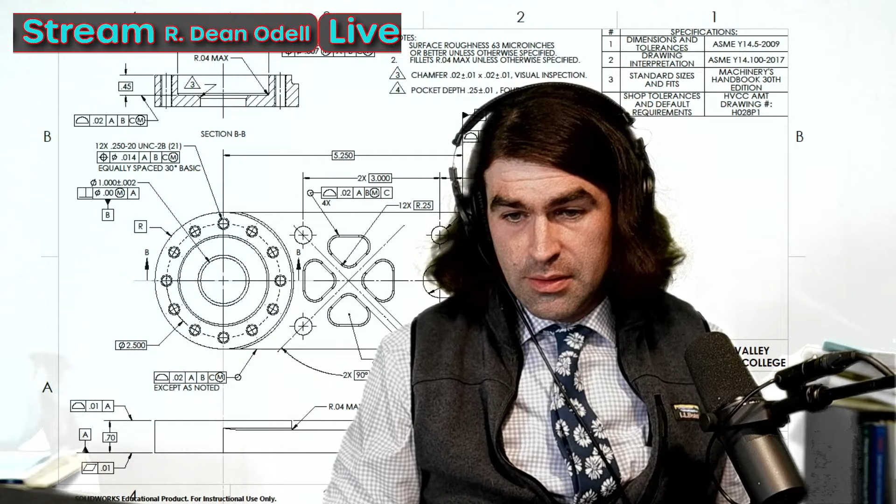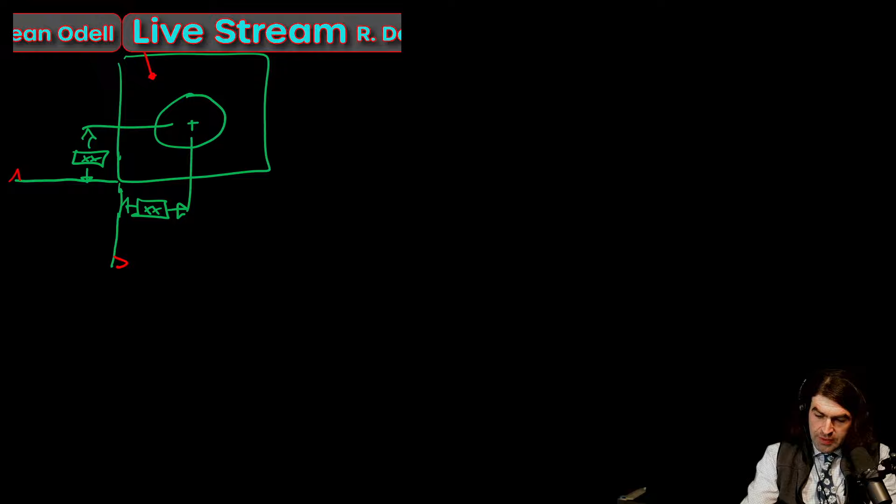We're going to have datums. And this drawing is going to be slightly incomplete, so don't screenshot me. It's just right, nice and simple. So we got basic dimensions. Doesn't matter what the actual number is because they're theoretically exact, right? They're perfect. So there's no variation on that.

So we've got datum A as a surface parallel to our screen because we have this leader with the filled in dot. Datum B is horizontal. Datum C is vertical. That gives us the origin for our measurements right in here. Okay. With position, when we use GD&T, that gives us a little round tolerance zone right in here.

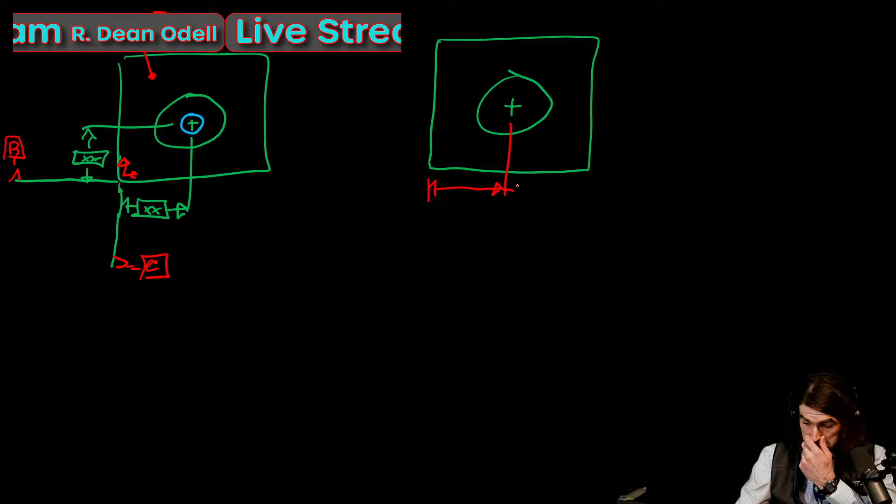Now I want to contrast that to the exact same part with plus or minus dimensions. So with the plus or minus dimensions, I am going to give it a tolerance. Right, so in both cases, I don't care what the diameter is or what the tolerance on it is.

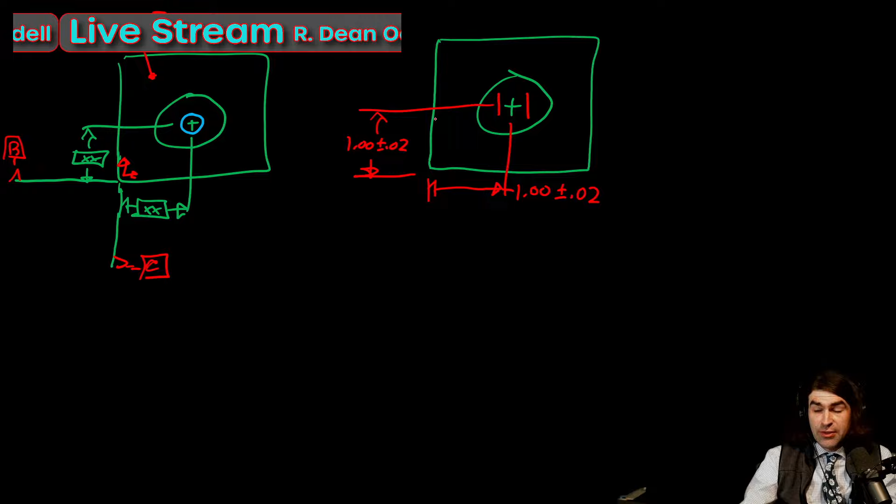So in this case, with this plus or minus dimensioning scheme, the tolerance zone is not going to be a circle or a cylinder. It's going to be a square. Right? And I hope we can kind of see that. You've got your variation left to right. It's 20 thousandths. Variation up to down is 20 thousandths. So you end up with a square in the middle of the part.

And for some things, that's basically fine. You know, like some flat, sheet metal-y parts, it really doesn't matter that much. As parts get thicker, position starts to matter more because position is going to have an influence on the perpendicularity, whereas with the plus or minus, it's difficult to do that without complicated notes.

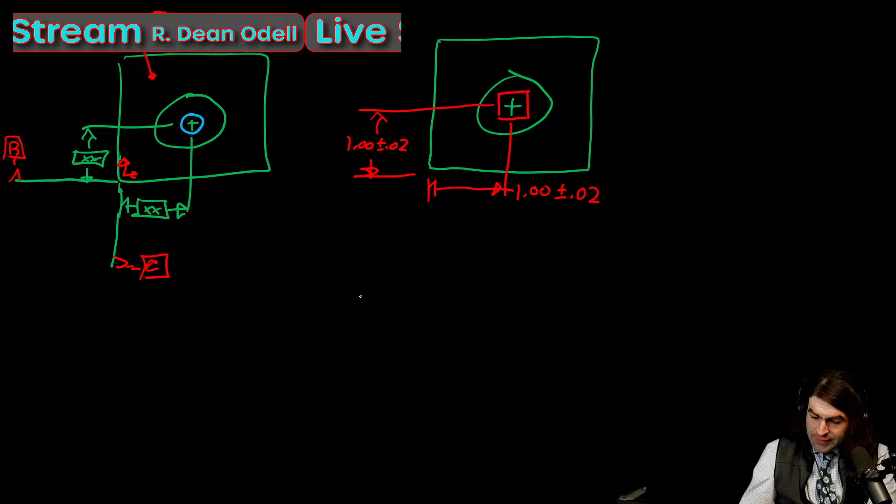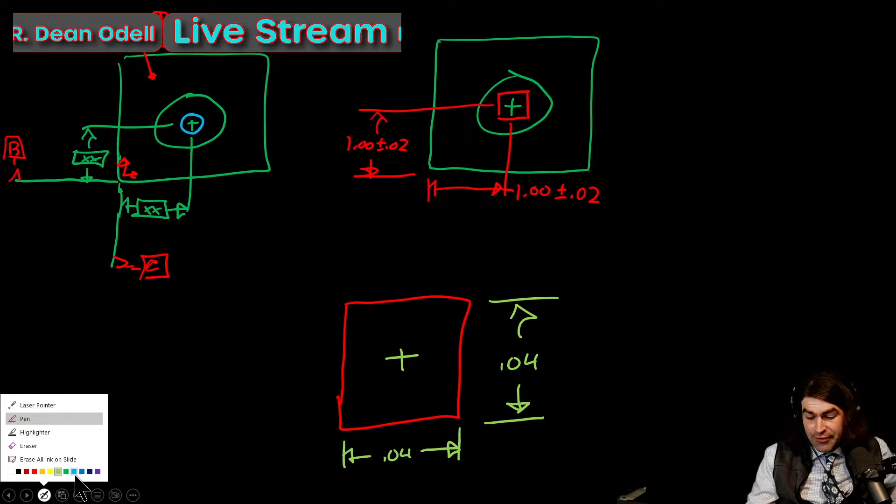Okay, let's take a look at this tolerance zone, or coordinate dimension tolerance zone. So we're saying we've got this square that's plus or minus 20 thousandths. So the square is basically 40 thousandths, right? And at the center is where we'd really like the center of that hole to be, right? And I know those of you that have taken a GD&T class have definitely seen this before and probably had it explained before. But those of you who haven't, this is a good way to see what's going on.

All right. So say we make a couple of these parts and the center of the hole is in a couple of different locations, right? Marked by these little X's. So the first location, let's say we have a hole and we measure and it's right at this edge, right? Plus 20 thousandths in the Y, 0 in the X. That's going to be acceptable, right? No big deal. Same thing if we measured over here, that would be acceptable. We're just plus 20 in the X, 0 in the Y.

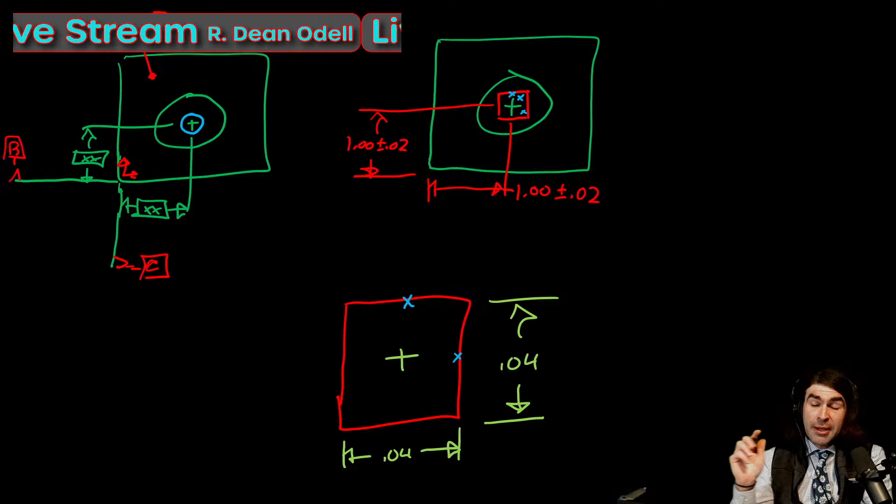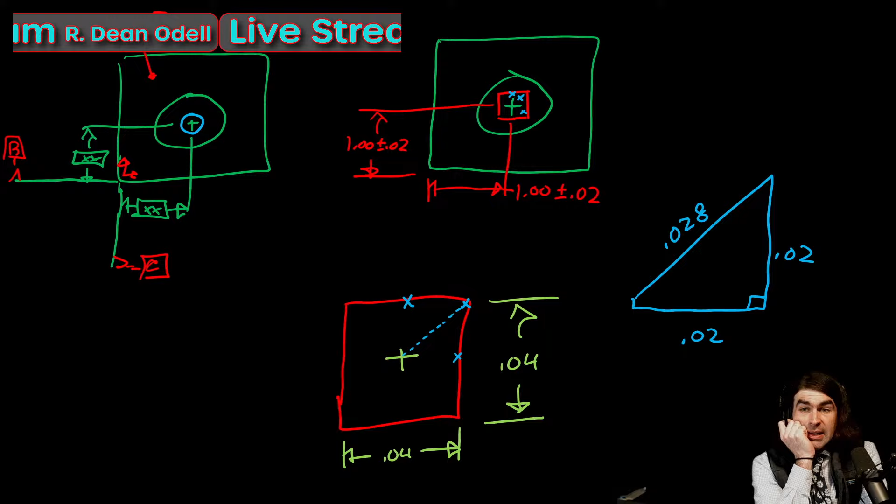And we'd be okay if we have a hole in this corner, right? And that distance is going to be greater than 20 thousandths. And most of you probably already see this, right? We have a little right triangle with 20. And if I can remember right, the hypotenuse is 28 thousandths. And that's just going to be Pythagorean theorem. No big deal there. The problem is I could measure a hole, say, down here, and it's 28 thousandths away from the center, but in the wrong direction, basically.

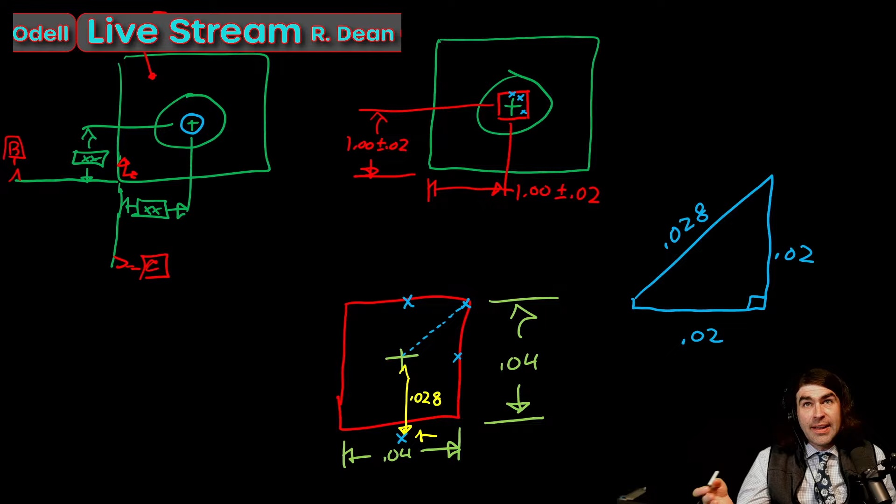So what happens is we have to fail this last part right here because it's outside of the square tolerance zone, but it's the same distance from the center. So notionally, that part would work the same as a part that has the measurement in the corner here. So what we're doing with tolerances of position is we just make this a round tolerance zone, right? We just put a circle around the square. And that's how we're going to describe a tolerance zone.

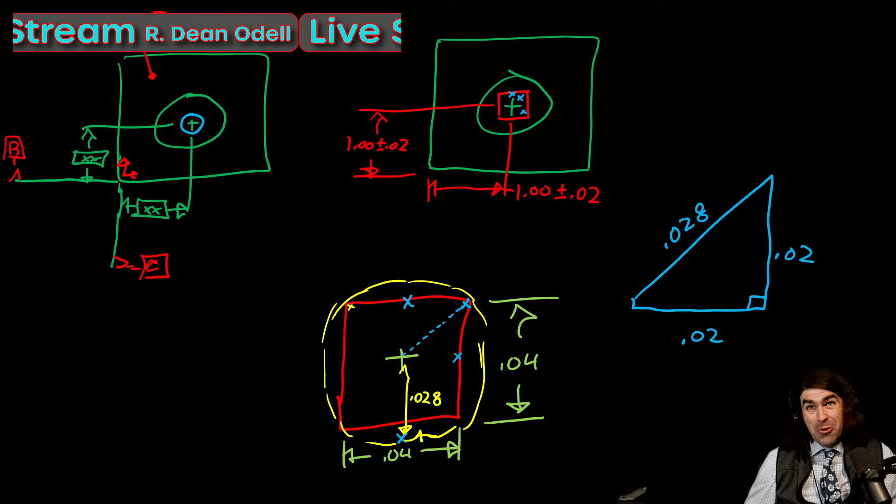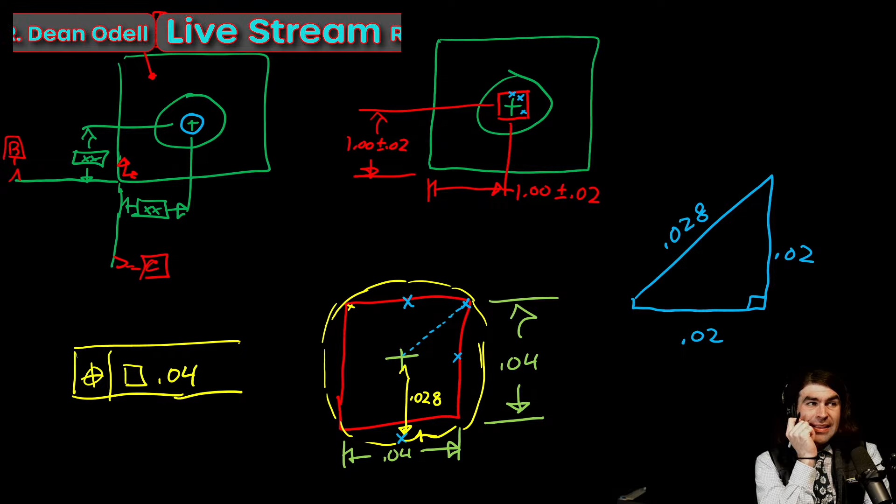Now, you can, with position, have a square tolerance zone if you wanted to. It requires that you use 2 feature control frames. You could do a rectangle or a square. There's no support for this, and I've gotten this question before. Why can't I use the sweet square symbol of 40 thousandths and apply it to something? I think the main problem with that is it's not clear what orientation the square would be in. Also, there's no documentation, no pictures, nothing in Y14.5. So you'd be on your own if you put this on a drawing. You'd really have to explain exactly what you're looking for there.

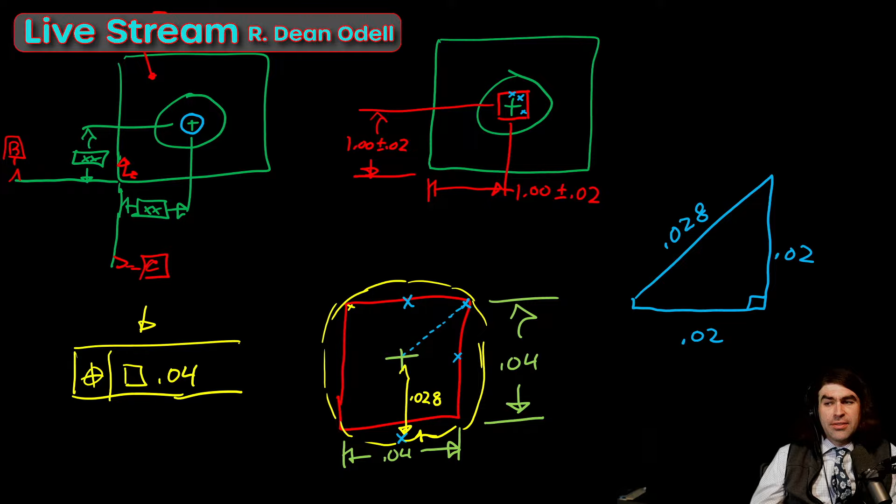Okay. So this round tolerance zone effect, what happens is when we go to measure a part, and you may have seen my video about this, you're going to measure from the granite plate in each direction. So you're essentially going to measure in the Y direction and then measure in the X direction. When your tolerance zone is a square, your X's and Y's are directly comparable to what's on the print, right?

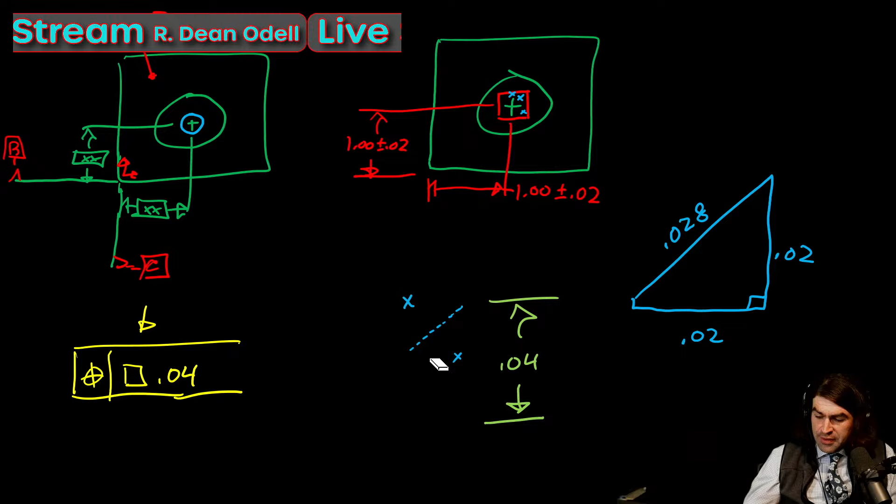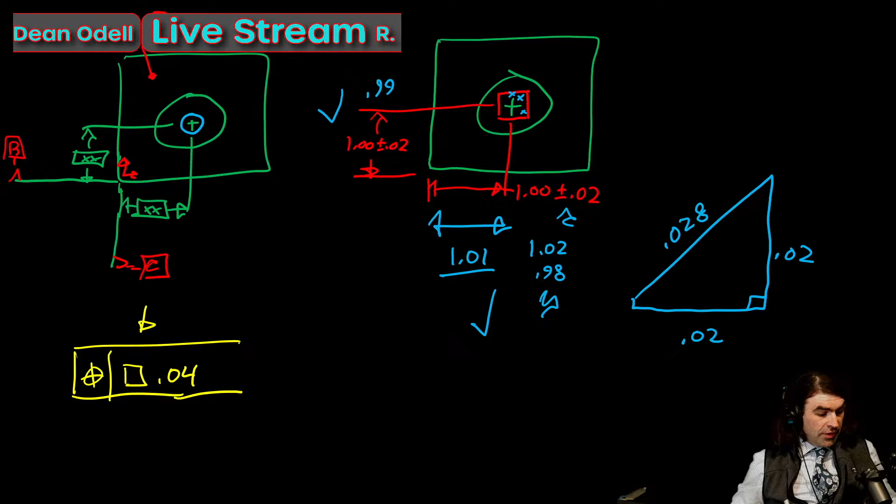So if I go to measure this part, and in this direction I get 1.01, I can look at this and say, okay, my maximum is 1.02, my minimum is 0.98. I measured 1.01, we're good. You can do the same thing over here. You can say, okay, we measured 0.99, that's greater than the minimum, we're good. And that's all you have to do as far as inspection, as far as verifying your measurements, which is pretty cool.

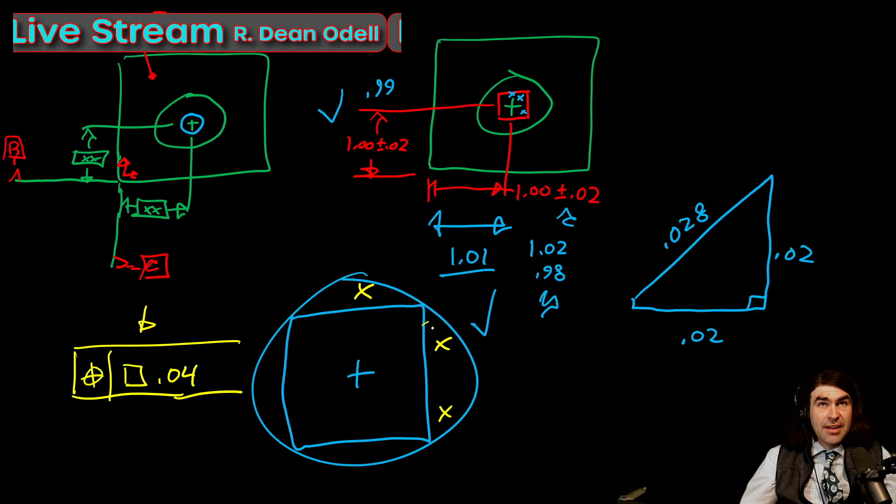Pretty quick. The issue with position is sometimes you can, just by looking at it, tell that it's within a square, that it's within a circle. But with position, you can have this round tolerance zone. You got this square, that's your plus or minuses. It's difficult to tell, in your head, if something that landed in this kind of no man's land is within tolerance or not without calculating it or graphing it.

Give me 1 second. Oh, sweet. Okay, so I gotta show you guys this. Check this out. I got this from eBay. It's a position computer. So I guess this is before calculators were super common for this. But basically, the way this works is on one side, and let me get this closer to me.

So say we measure an X and a Y, and we get 11 thousandths in X and 10 thousandths in Y. We follow this down, and that's going to tell us the diameter tolerance zone that is consumed. I can't even read it, so I don't know if you guys can either. So we've got whatever this number is. And then we can have any reasonable combination. So say we measure and we got 10 thousandths in one direction, 5 in the other. We would have a diameter tolerance zone consumed of 0.0224.

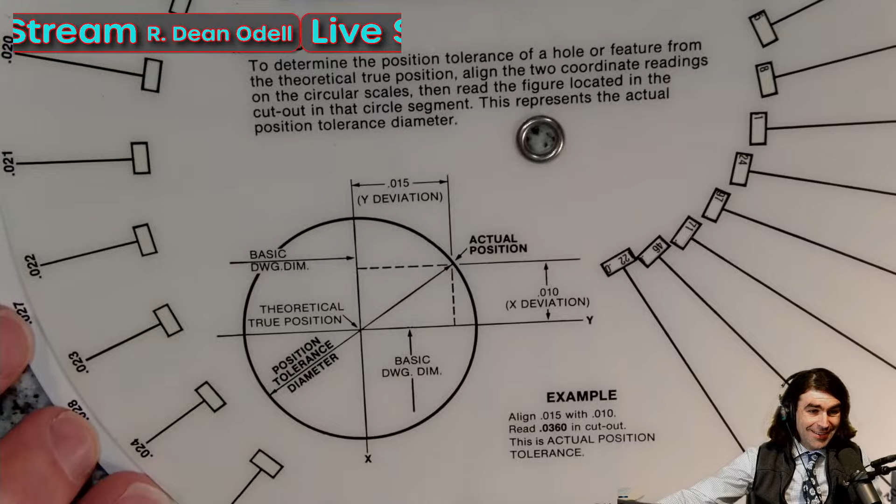So see what I mean? You get these measurements, you can't in your head tell if that would be good with a position of 15 thousandths or whatever. You have to calculate it. Now, not everybody is going to have one of these things. They are pretty handy though. They're pretty cool. You can use a chart. Obviously you can just do this in Excel and have a big wall chart. You could buy them. I mean, there are PDFs and stuff out there on the internet. We'll talk about, maybe today, maybe I'll have to do it some other time, the floating fastener, fixed fastener formulas as well. Same idea, these can just be calculated with this sweet position computer.

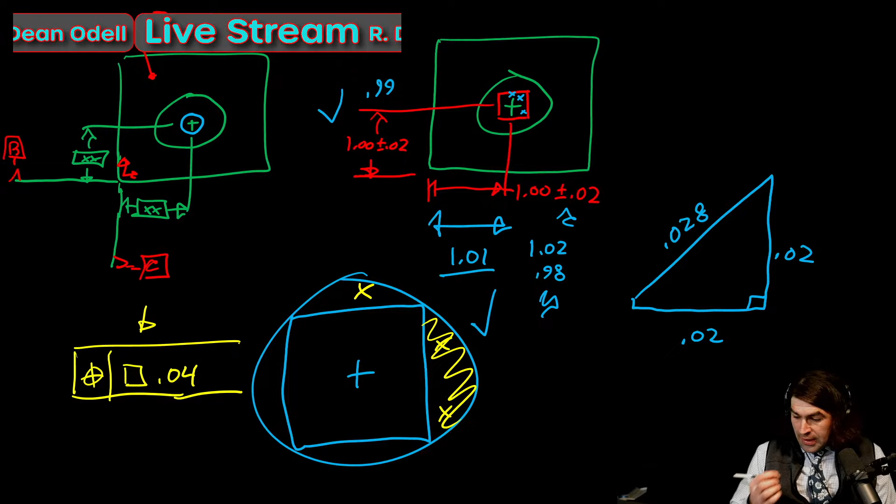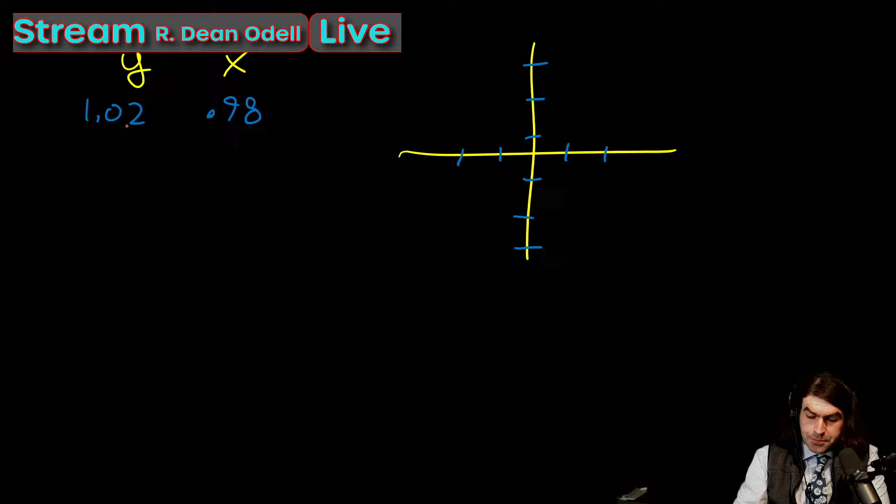Okay. So how do we figure out, say we go to make some measurements, and let me wipe this. Say we make measurements. And this is what we get. We measure our gauge pin. We subtract half the gauge pin, and this is where the center is. So we want to plot this on a little chart. And some of you may have seen this before. I covered it in my position video. So these are the measurements we get.

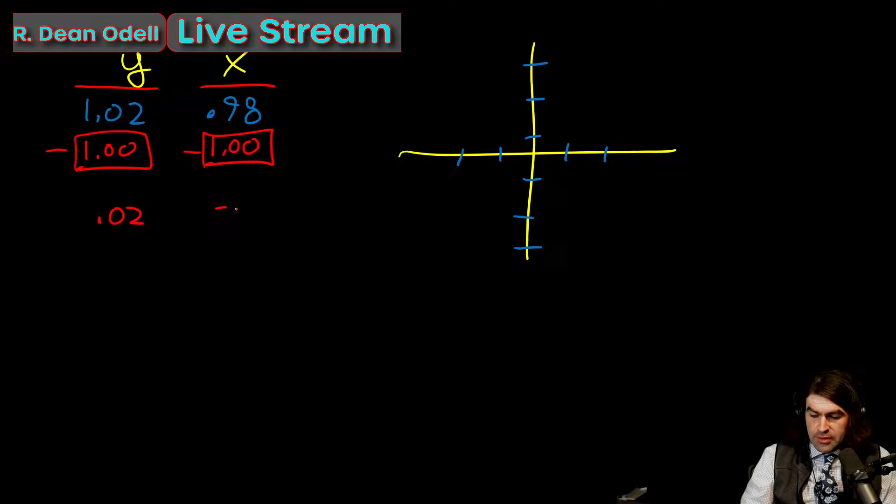What we want to do is compare each measurement to the true position. So in the center of each of those tolerance zones on a part with multiple features is a true position. So we want to get rid of the basic dimension. So we're just going to subtract, and I didn't put it on that drawing, but let's say the basic dimension is 1 inch. And this is going to give us our variation in X and Y. And we can plot this on our chart. So what I would do here, Y, we're going to be +2, and X, we're going to be -2. So our point would be right here.

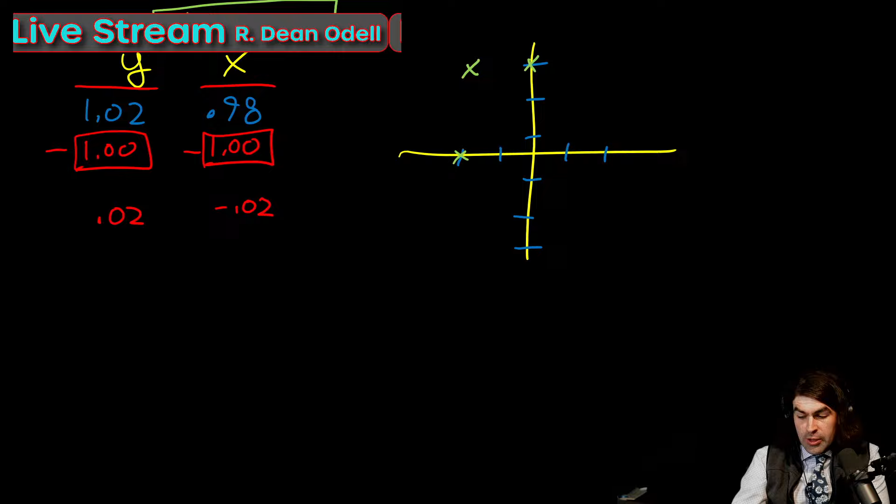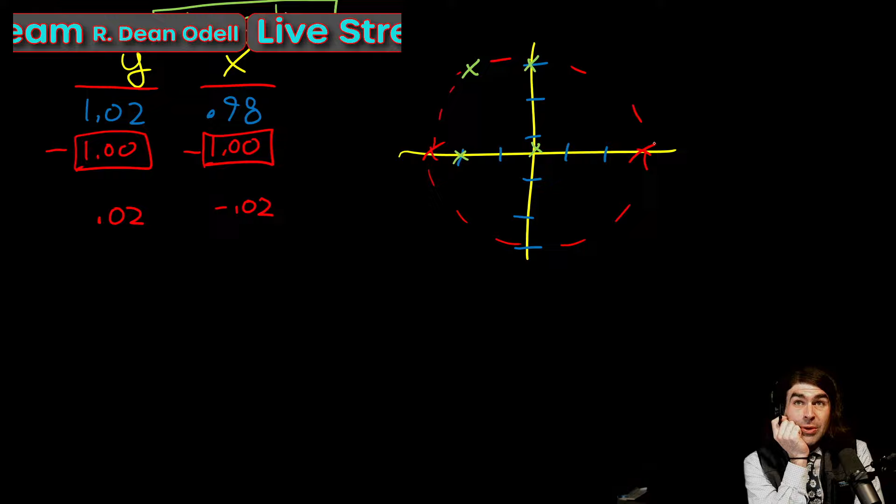And we want to know if that point, let's just make up, we want to know if that point is within a tolerance zone of, say, 28 thousandths, to some datum reference. So one way to do it is graphically. All we need to do is set one leg of a compass in this X, one leg in the center here, and then we can swing it around and just read off the ticks. And that'll tell us what the diameter tolerance zone is. And that's a perfectly valid way of doing it. The analytical way, to get an exact answer, as you might imagine, is to use Pythagorean's theorem.

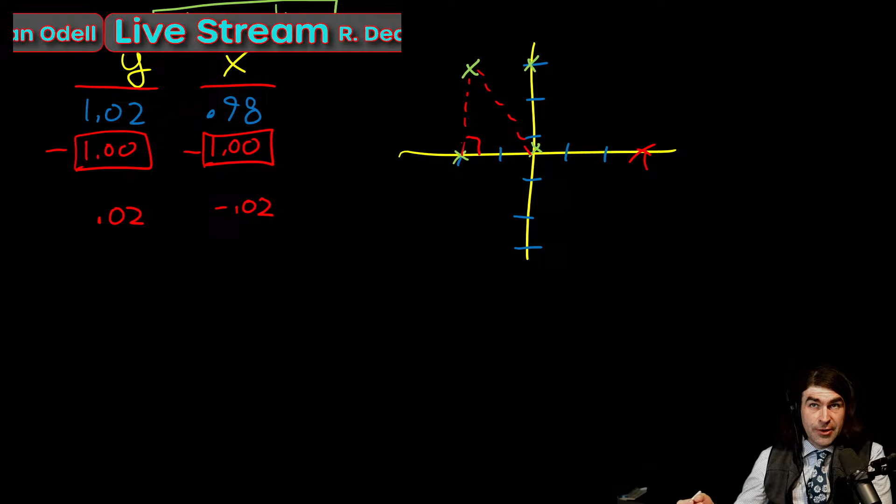Right, we're going to find the triangle. We're essentially going to compare one leg to the other leg to get the hypotenuse. So you may remember a squared plus b squared equals c squared. Right. So what does that really mean? I know everybody hasn't been in a math class recently, so it's okay if you don't recognize it immediately. Basically, the one side is a, the other is b, the other is c.

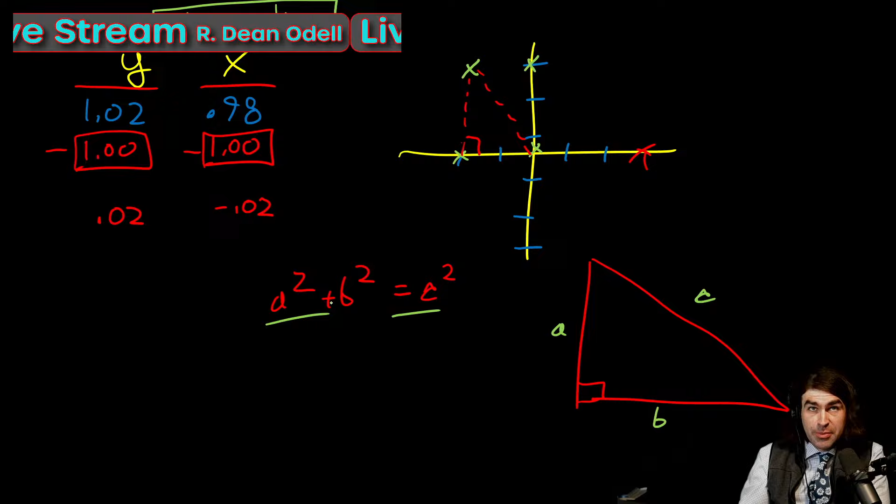So they have to meet this expression, right? a squared plus b squared equals c squared, if it's a right triangle, right? If this is 90 degrees. So what we want to do is rearrange this to solve for one of these, right? We want to solve for c, right? We want to know what that is when we're calculating position, because we're going to know the x and the y. That's what we're going to measure. And we got to figure out what the hypotenuse here is. So easy peasy, right?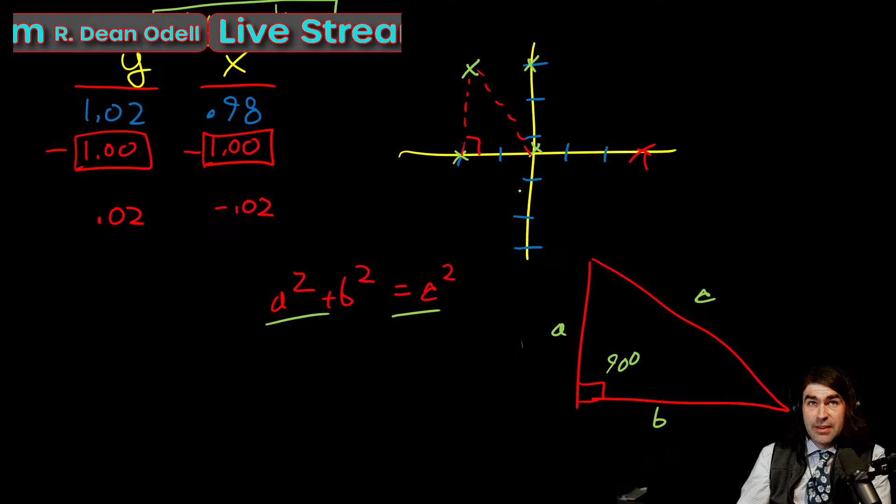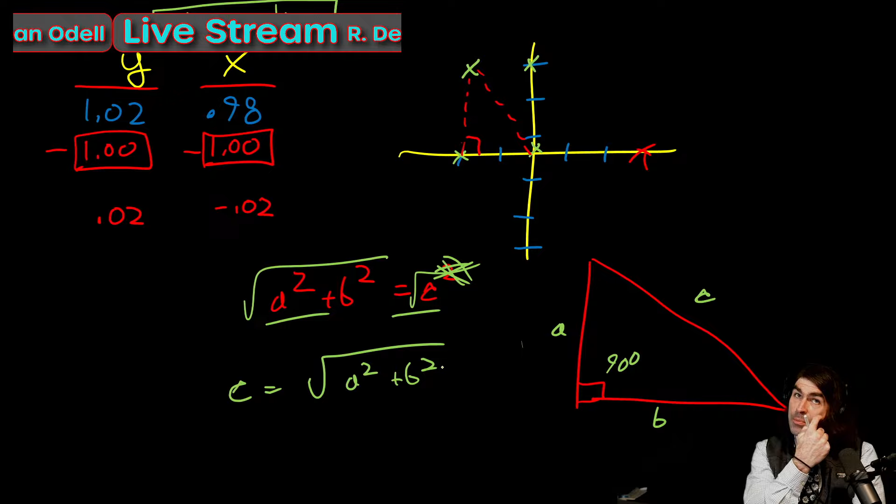We're just going to take the square root of both sides, and that's going to cancel out here, right? Square root and exponent cancel out. So we end up with c equals the square root of a squared plus b squared. We plug in our handy numbers here, right? And it's okay that it's negative because we're going to square it, right? A number times a number. A negative times a negative is a positive. So we'll put 0.02 here. We'll put 0.02 negative here, squared, add, equals c.

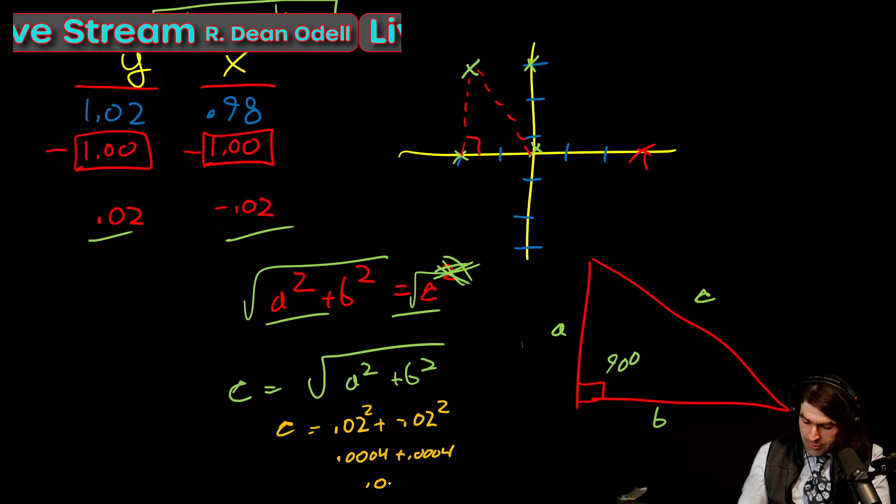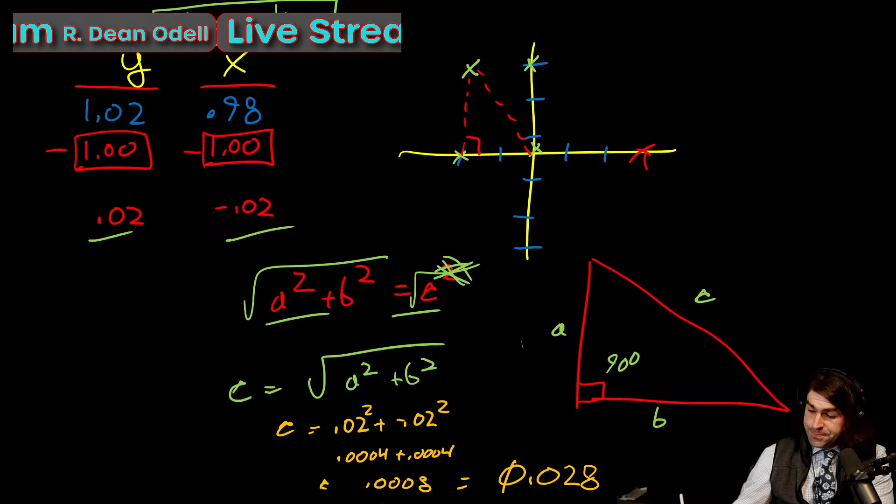I know this is going to be 4/10 of a thousandth. This is going to be 4/10. I don't know the square root of 8/10 off the top of my head. I'll have to go to my handy calculator. So that's going to be a diameter of 0.028, right? Which tracks. Oh, I'm sorry. That's going to be a radius. So we're saying this number is 0.028, and I'll explain why that's cool.

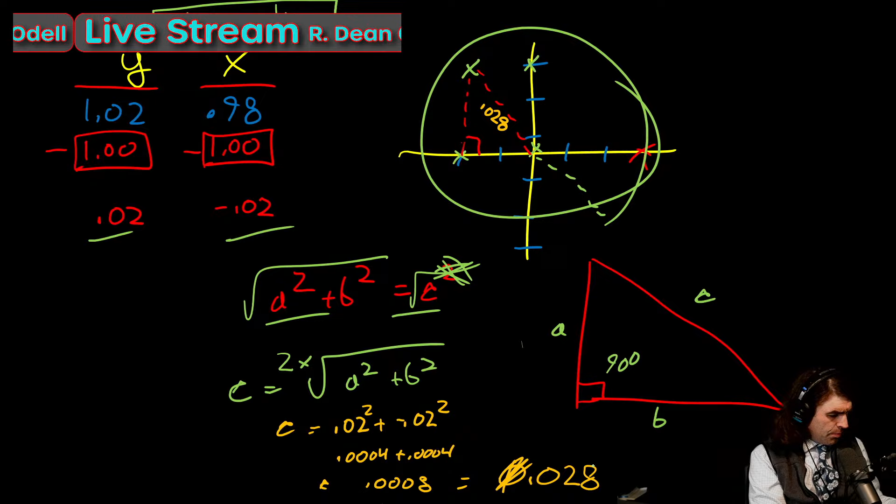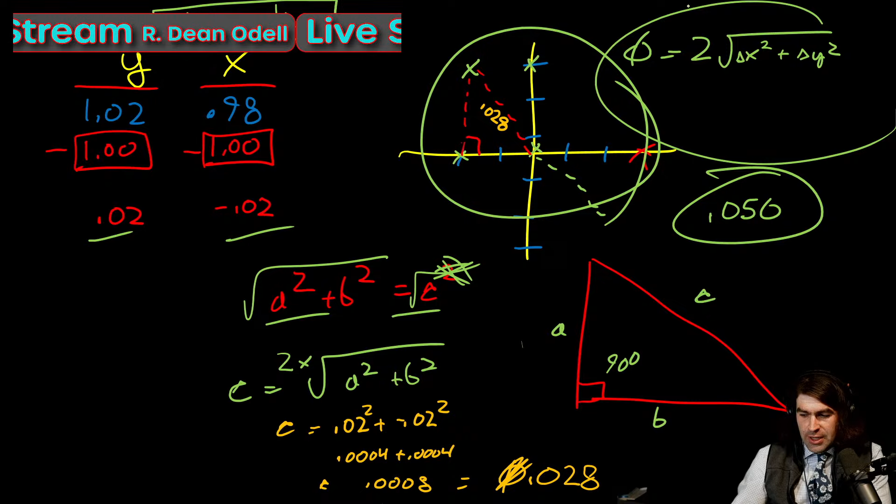What we need for the diameter, we need to double that. Right, so we're going to multiply this by 2. Right, so this 0.028 is going to become, I think, 0.056. Yep, 0.056 is going to be our answer here. Now, when you look it up in any textbook, you'll see it written as this: 2 times the square root of variation x squared plus variation y squared is the diameter. So I did it the drawn out way just to show you that it comes from somewhere. It's not just an equation that was handed down from above. It was just a variation of the Pythagorean theorem.

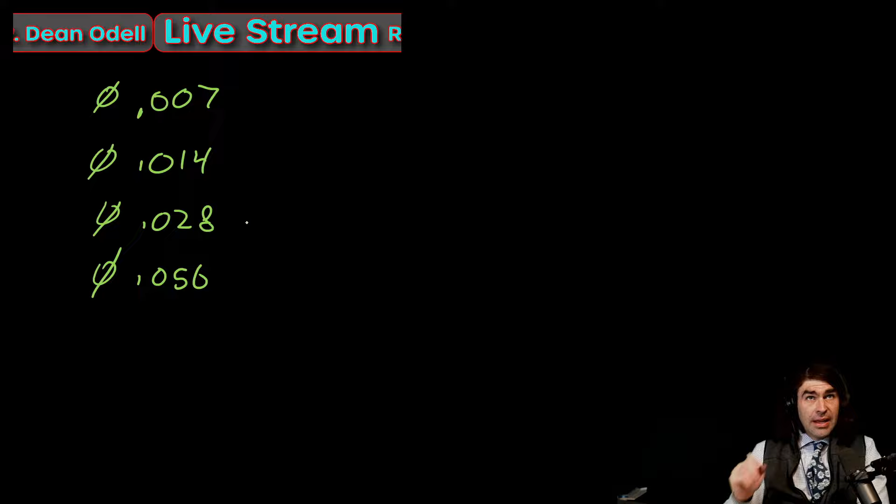Okay, why did that 0.028 seem familiar? Well, you may notice when you're dealing with drawings that you'll often see these numbers in a feature control frame for position, right? 7 thousandths, 14 thousandths, 28 thousandths, and 56 thousandths. Let's start with a diameter of 14 thousandths.

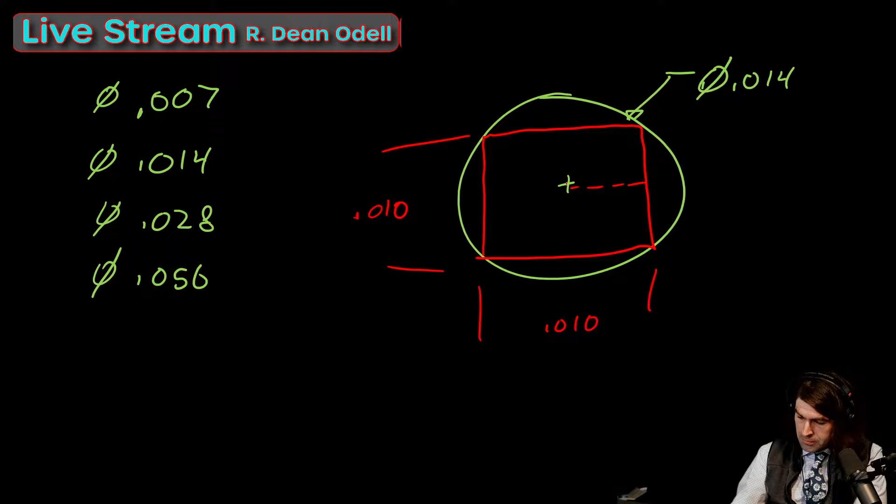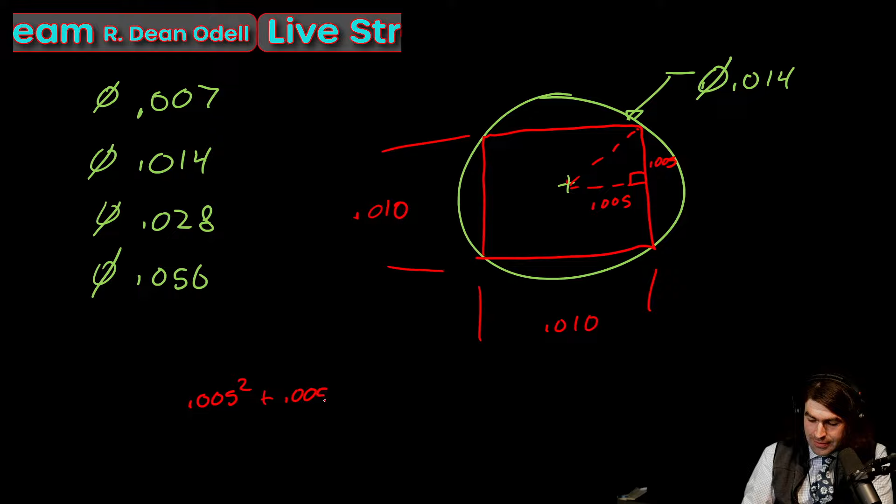It turns out that a diameter of 14 thousandths corresponds with the square of about 10 thousandths. So if we take this little triangle here, we're saying 5 thousandths by 5 thousandths. Let's actually solve this. I want to make sure I'm right. I know I keep saying getting screenshotted, but I don't want to be wrong. So we've got 5 thousandths squared plus 5 thousandths squared. That's just going to be 0.0, a bunch of zeros and 0.025. 4 zeros. Woof.

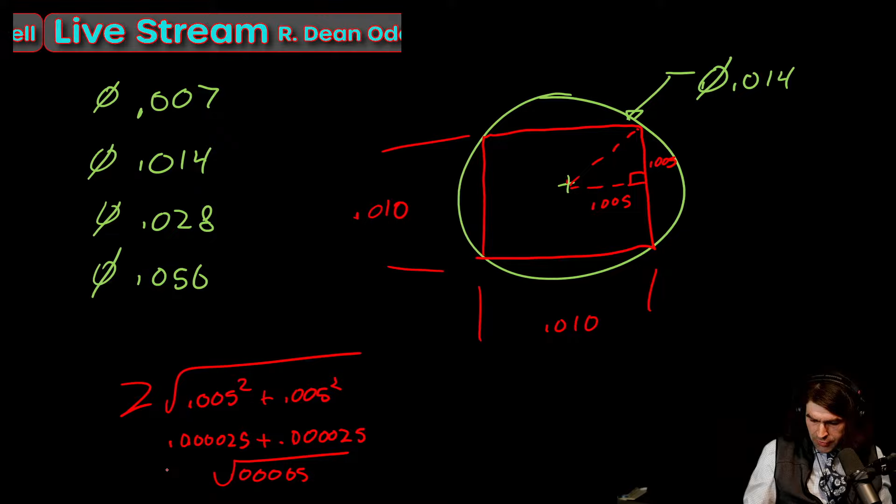Sweet. So this is going to give us a radius of 7 thousandths. All right. I was 99% sure that was correct, but just to make sure. It gives us a hypotenuse or radius of 7 thousandths. We double that. That's that 14 thousandths right here. So why did I go through all that mess?

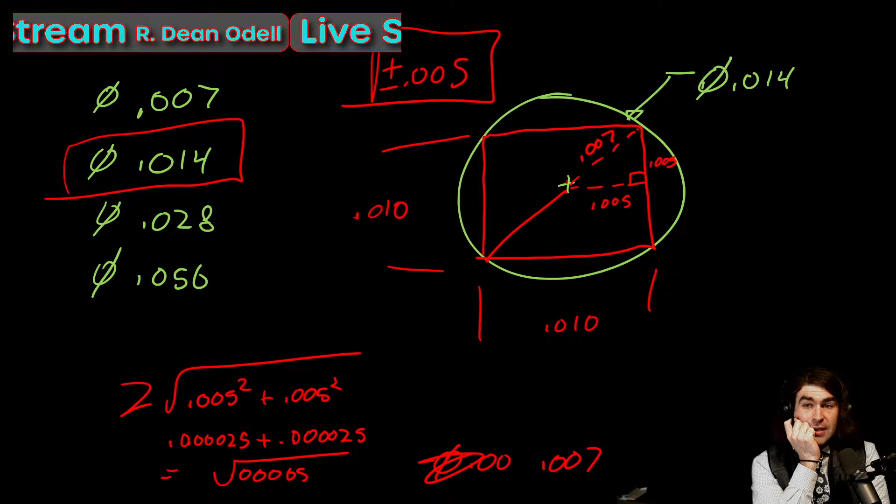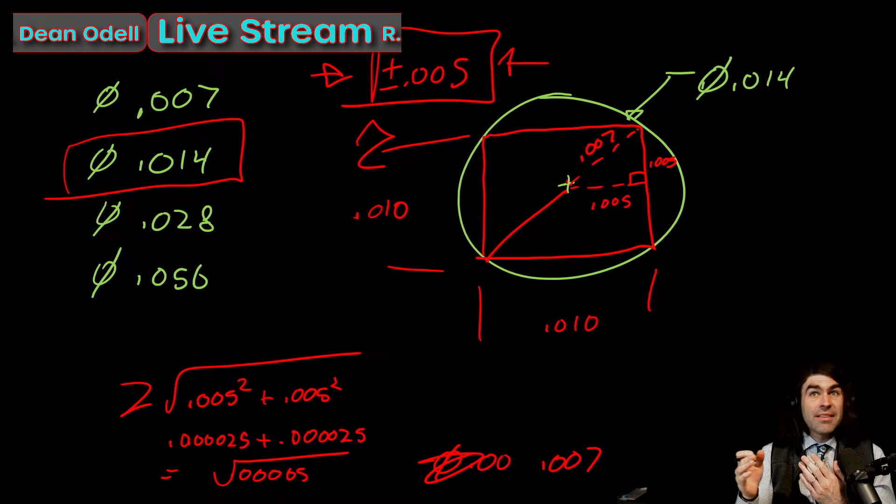It corresponds, if you're setting up a machine tool, to plus or minus 5 thousandths. So when you're looking at a drawing, diameter tolerance is great for engineers and design or whatever, but when you're actually thinking about what machine can I use, can I use a bandsaw or do I need to use something a little more accurate? Like, how much time do I need to spend indicating something in? This is the language of the machine shop, plus or minus. That's going to be a really helpful number. So if you can look at a drawing and say 14, 15, 13 thousandths diameter tolerance zone, that's plus or minus 5 thousandths-ish.

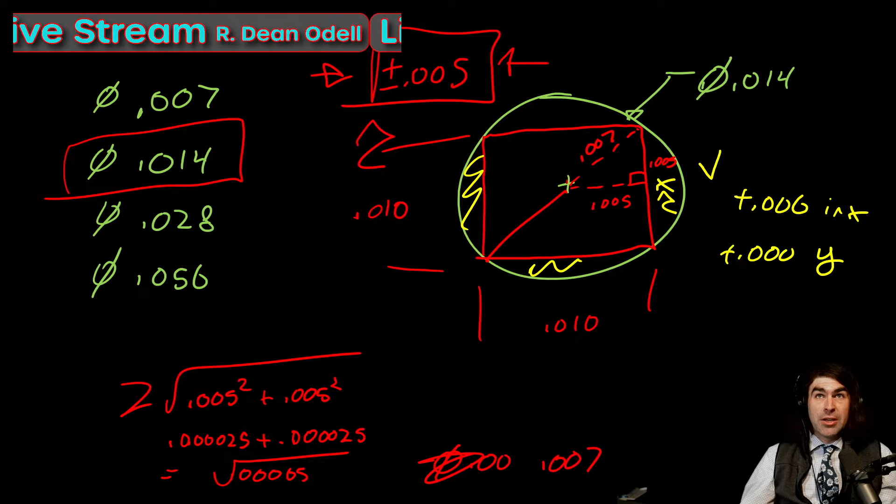Now, you'll hear people say, "Whoa, that's not correct because you have all this tolerance zone here." That's why I say ish, right? It's not a rule of nature or anything. It's a helpful way to remember what's going on. Yes, there is a chance that your part is going to measure plus 6 thousandths in X and plus 0 in Y, in which case, yes, it's going to be right here, and that would be good, even though it wouldn't be good to plus or minus 5 thousandths. That's not the purpose of this. This is just to break down these diameters into helpful plus or minuses for speaking in English to people, stuff people are going to understand.

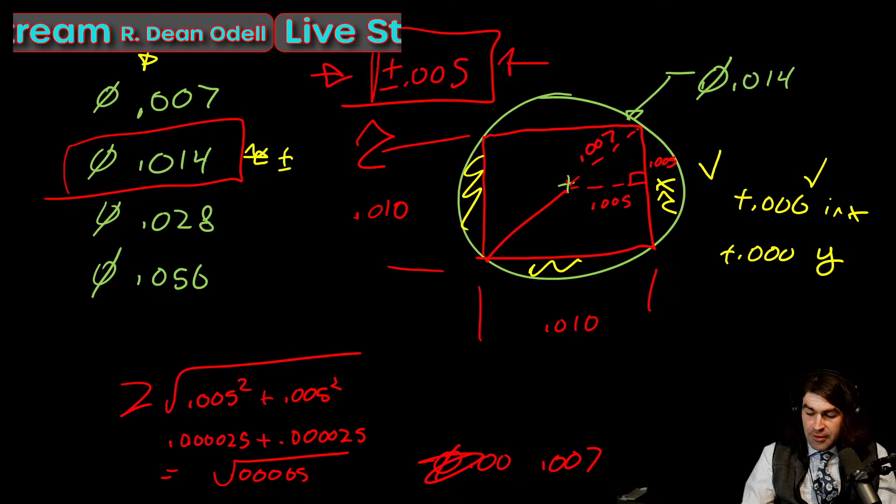So 14 thousandths corresponds here. So I'm going to use, I forgot what this is called in math, the squiggly equal sign, plus or minus 5 thousandths. Let me use a better color.

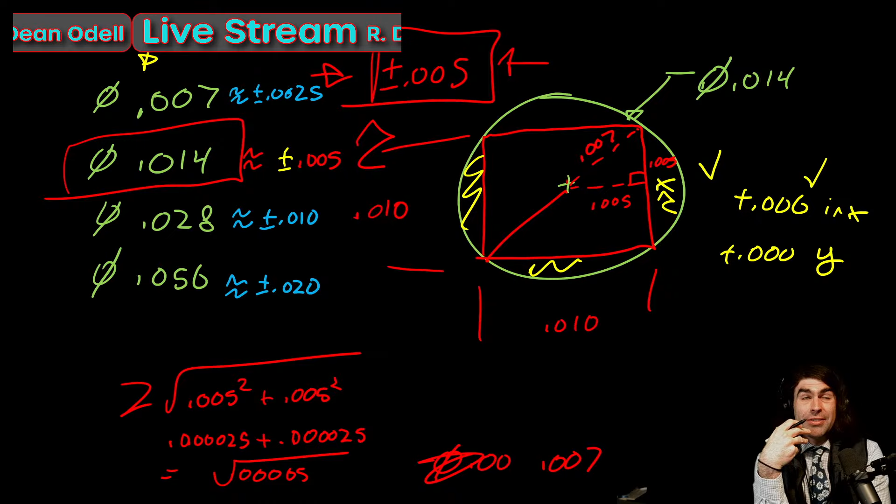Squiggly equal sign, plus or minus 10 thousandths. Squiggly equal, plus or minus 20 thousandths. A little squiggly, plus or minus 2.5 thousandths. So when you get a position tolerance zone less than 7 thousandths, it really gets difficult, right? Plus or minus 2.5 thousandths is very small, obviously, right?

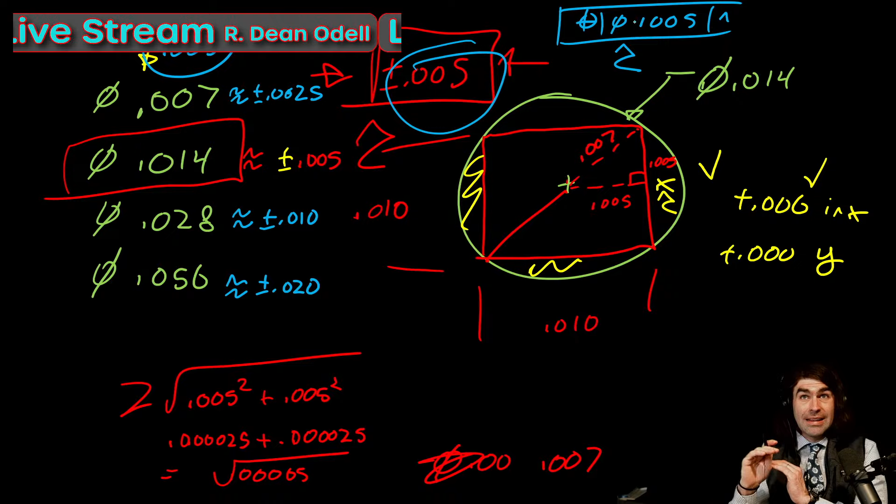So if you're taking from a drawing that has locations that are plus or minus 5 thousandths, and you put it in the feature control frame, and you're like, okay, the drawing said plus or minus 5 thousandths, so I'm just going to put 5 thousandths for the position tolerance zone. It is very, very expensive to do it that way. It's not really necessary to do that, right? You want to kind of figure out what's going on here.

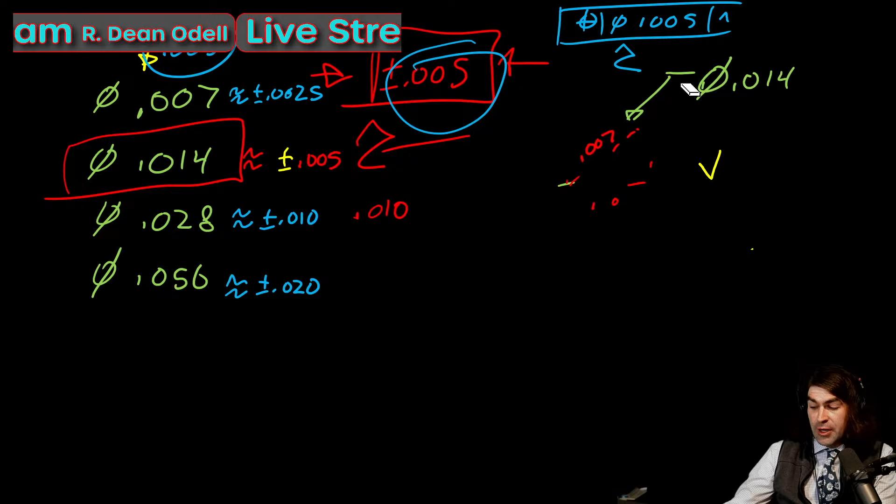That's going to bring me to my next point. What if my drawing does have plus or minus on it, and I want to convert it to position? Well, there's basically two ways to do it. Feel free to put in the comments if you know a better way, or one is way superior to the other. So say our drawing has location tolerances of plus or minus 5 thousandths. That's going to correspond, right? So the drawing has got this. It's basically 10 thousandths square tolerance zones.

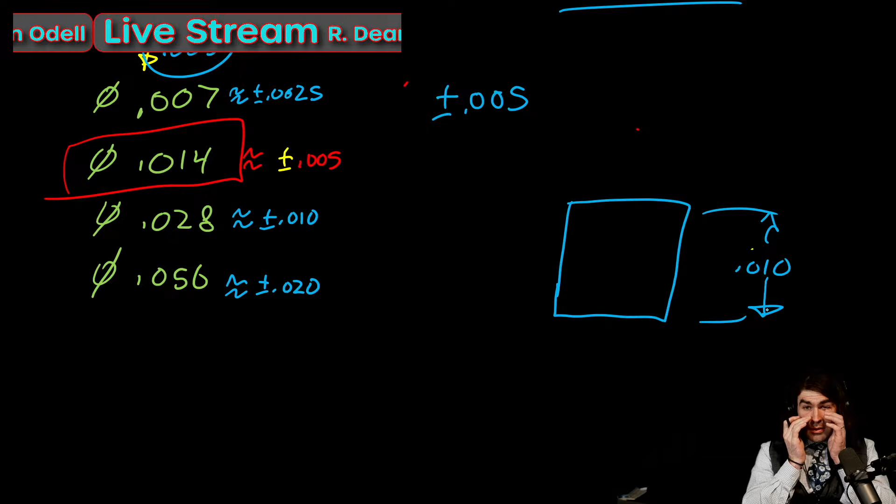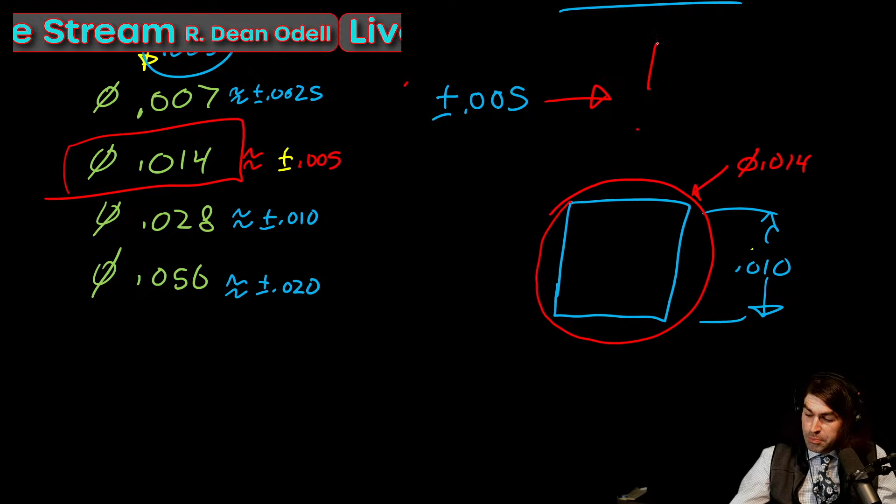If we just take what I've been saying, a 10 thousandths square, and we fit a circle around it like this, we inscribe the square. I hope that's the right term. It's either inscribed or circumscribed. I think it's inscribed. We're going to end up with a diameter of 14 thousandths, right? So we just put that in our feature control frame for position.

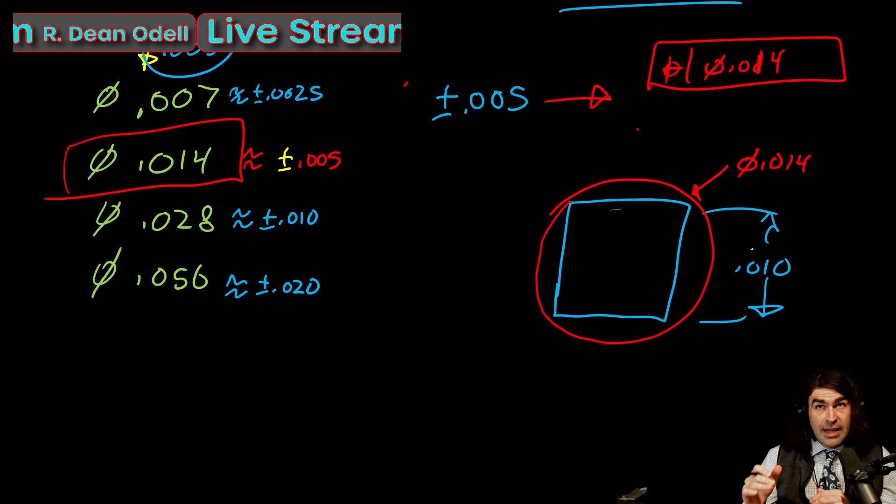Now, that isn't the way you're always going to want to go. Why? It's non-conservative, in that the original design limited it to this square, right? And your first thought might be they didn't know any better. They didn't have GD&T back then. Maybe they did. Maybe this was really a part of their design, that it couldn't move left and right or up and down as much. So this area is extra that you're adding in when you do this conversion.

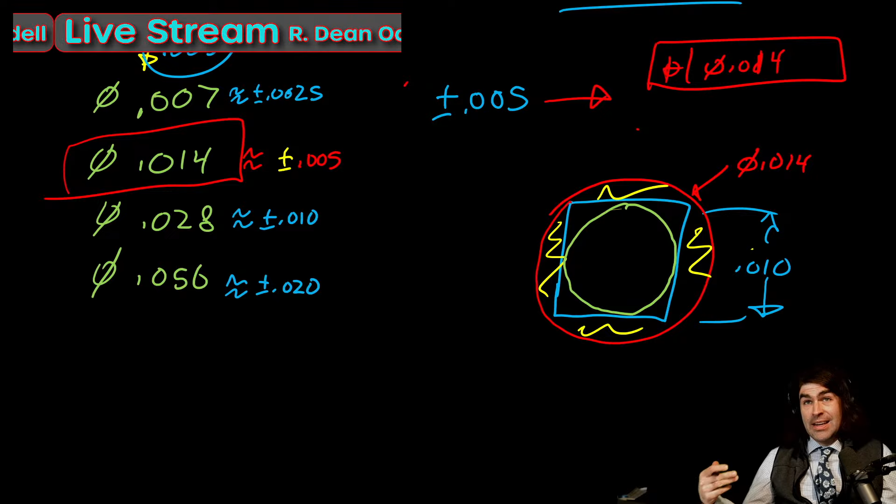So the more conservative way to do it is to say, okay, we're switching to position, but now we're going to put the diameter inside of the square tolerance zone. In this way, you're not adding any additional tolerance that the original design didn't have. So in this case, our radius is going to be 0.005. So we're going to say conservative, diameter of 10 thousandths, right? So we lose out, but still better than having a coordinate dimensioning scheme, in my opinion. In most cases, not all cases.

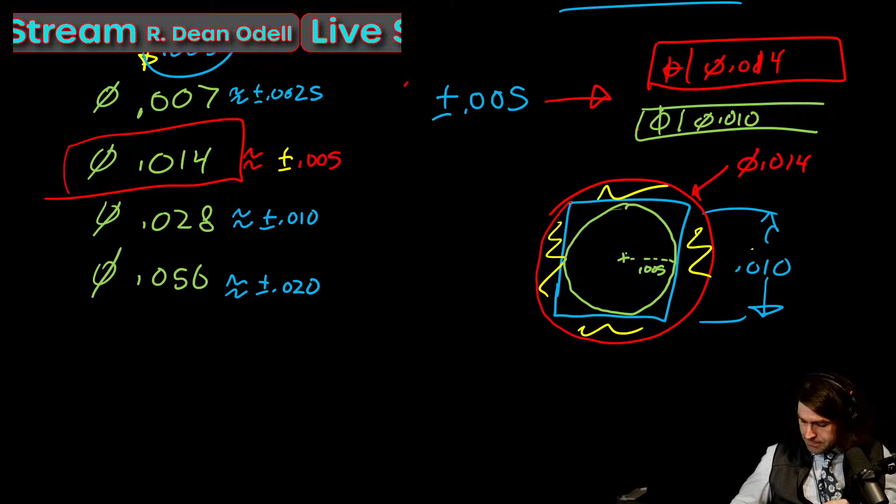Okay. Oh wow, it's already been 35 minutes. That's essentially how I would go about that. You've got this way and this way. Either of them is fine. You'll want to find the correct datum reference frame. So say we were going to convert this part to GD&T. It looks to me, for the datum reference frame, I would probably pick this back side to be the primary datum.

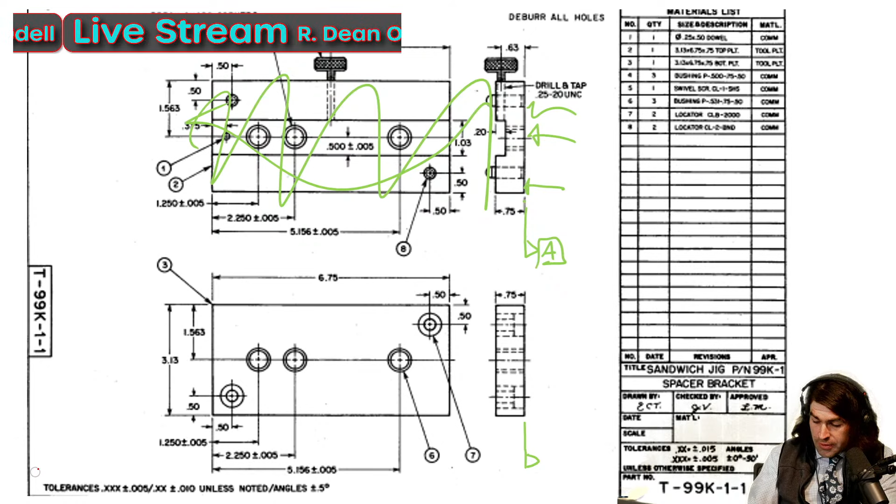Probably, I'm not exactly sure. You know what? Let's skip this top part. Let's do the bottom one. And let me get a better color. I would probably pick, actually, I would pick this side. You know what? Oh man, I can't make up my mind, guys. What I'm hung up on is I see these counterbores. I'm trying to figure out how it works. I think this is going to bolt up to something, so I'm going to stick with this side. I want the side that's pressing up against something else to be the datum, not the side we're drilling the counterbores through.

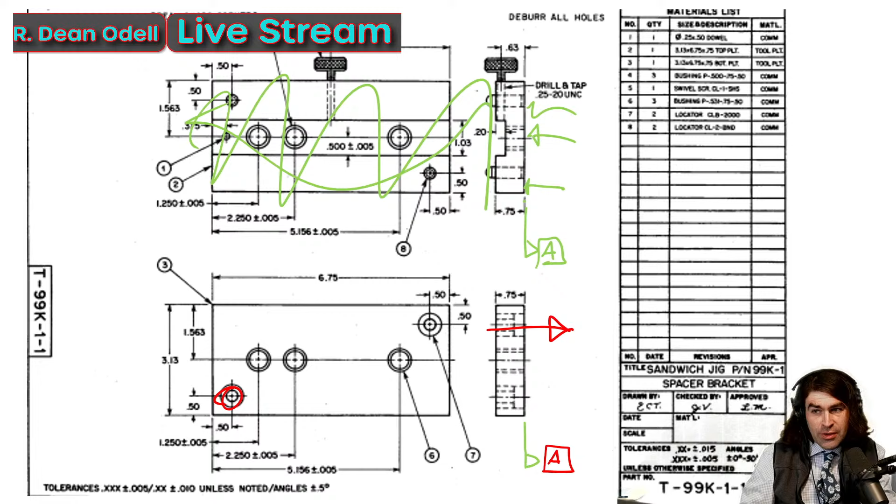Oh, let me take a second and do the chat real quick. Okay. All right, so hi, everybody. I see a couple people that have been tuning in. Like I said, I've only been doing these for a few weeks, and I plan on doing it next week as well. Someone in the group is wondering about one-on-one. Yeah, I do blueprint interpretation, I'm a consultant. Yeah, I do consulting. Just shoot me an email. I love tuning in, great content. Hey, Detroit.

Yeah, I know what you're saying here, Jason. Yeah, these views are really weird. I don't think that it's almost like it's first angle. I'm just kind of trying to gloss over it for now. Plus or minus 5 thousandths. Okay.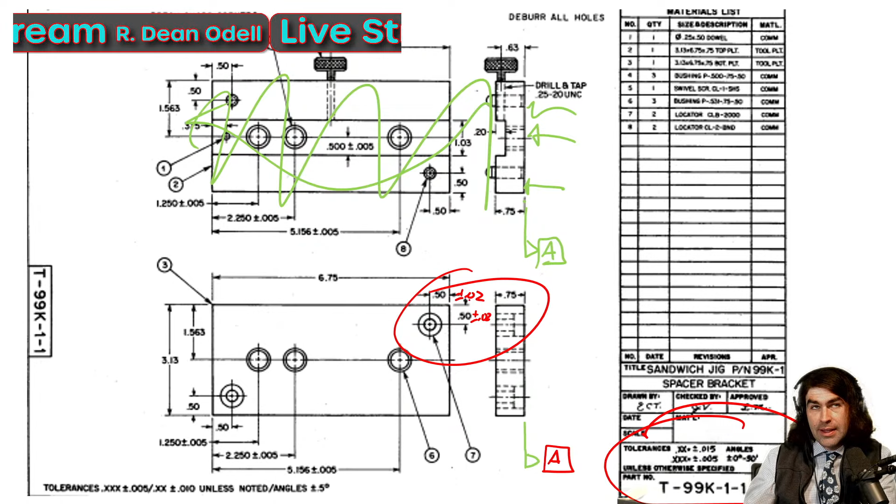These job shops are getting drawings from all over the place. And in the United States, at least, you're not required to have the same general tolerances. So it can really cause problems. Okay, enough of that. So we're going to go datum A here.

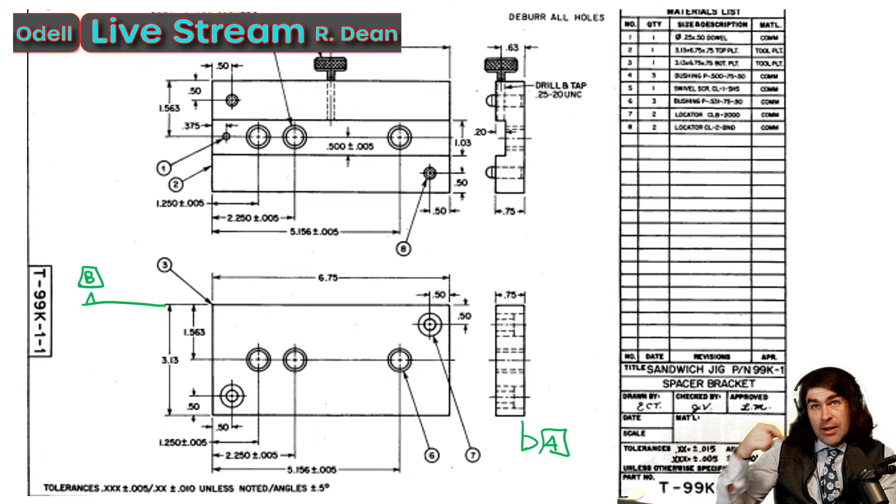Datum B, without any other real information, I would go with the long side. So why not pick the center plane? I know some of you are probably screaming into your microphones: shouldn't it be centered? The part is obviously symmetric. But since the original designer didn't do that, they have a dimension to all of these holes from one side when they didn't have to. They could have omitted this dimension and just put a center line here and it would have been symmetric, without GD&T or anything. So since they included that dimension, even though it doesn't make sense to me, I'm going to just leave it in.

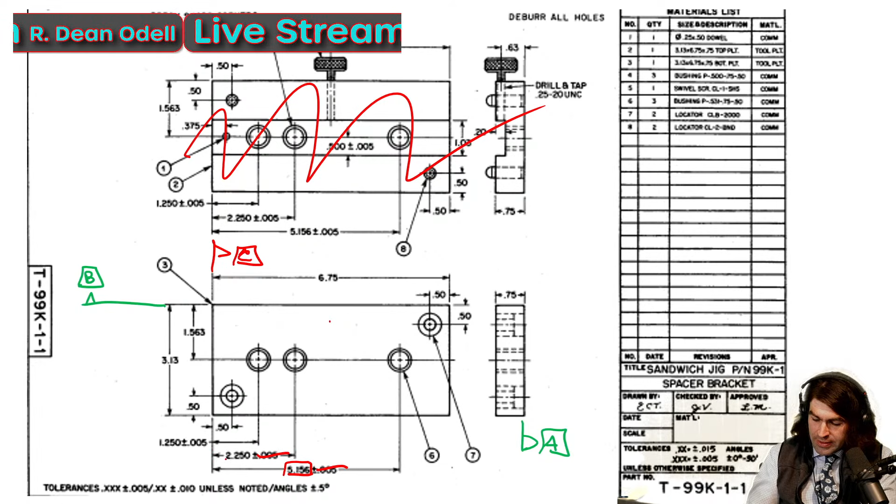Same thing with the next datum. You could say it's symmetric about, well, actually, no, it's not symmetric about left and right. Okay, so we're going to pick datums B and C, and I'm basing it off of these dimensions. That's how the designer dimensioned the drawing to begin with. So GD&T wise, we're going to make these basic. Get rid of these tolerances. They're all plus or minus 5, anyway. Make this one basic, and then I would make this, say, 3 times as well. I think that would make the drawing a little bit more clear.

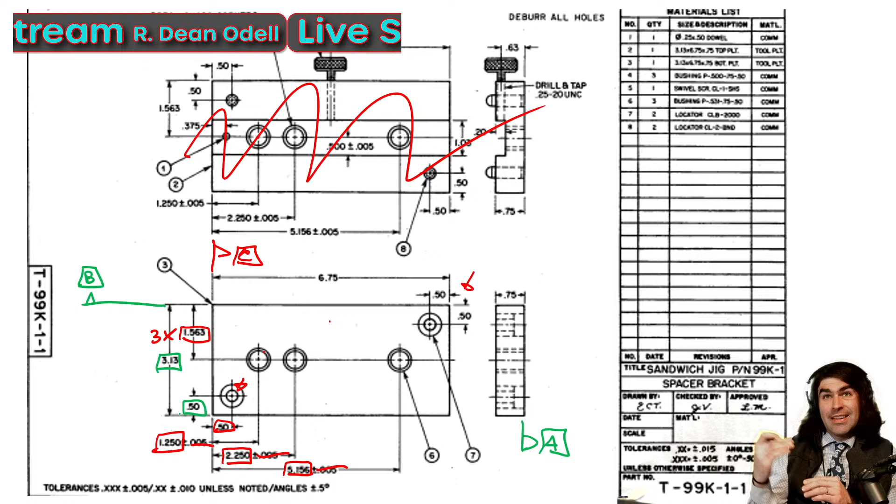And then we're going to come in. Oh, we would make these basic as well. Now, here's a pickle. This one, actually, no, this one needs to be fixed too. So here's a potential problem. These holes coming from the corners, if we want to make it GD&T legit, we'd either have to change this dimension or make this dimension basic. Let me use a different color. So what I mean is this needs to be basic if this is basic, because the basic dimensions have to lead back to our datum.

What we could do if we really just wanted to locate this surface with a plus or minus dimension, say we're using 2009 or something earlier, I could get rid of this dimension here and just have it come off of our datum like this. That would be fine. Or I can make this basic and keep that 0.5. It's got to be one or the other. Ideally, what I would like to do here is leave it dimensioned the same way. So make this basic, and just slap a profile to A, B, and C on that surface. Just control the profile.

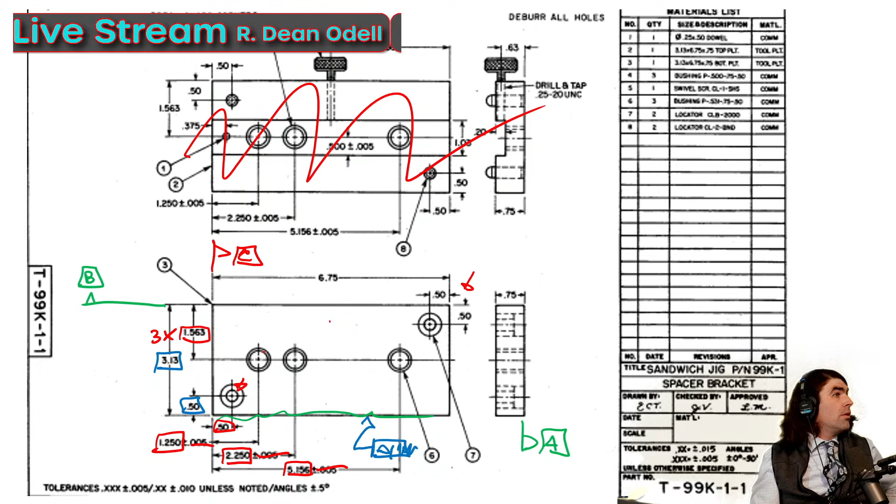Let me go there. Okay, let me check this. Huh. Oh, is that not working? Oh, these are all from YouTube. Huh. Hold on, guys, I'm just making sure the... Oh, maybe the LinkedIn one didn't work. Oh, well, whatever. Okay.

Yeah, and then we just come in with our position. In this case, for these 3 holes, and I don't even know where they're dimensioned here. Some kind of diameter, plus or minus something, position, diameter of something. And since these are plus or minus 5 thousandths, we make all of these a diameter tolerance zone of 7 thousandths.

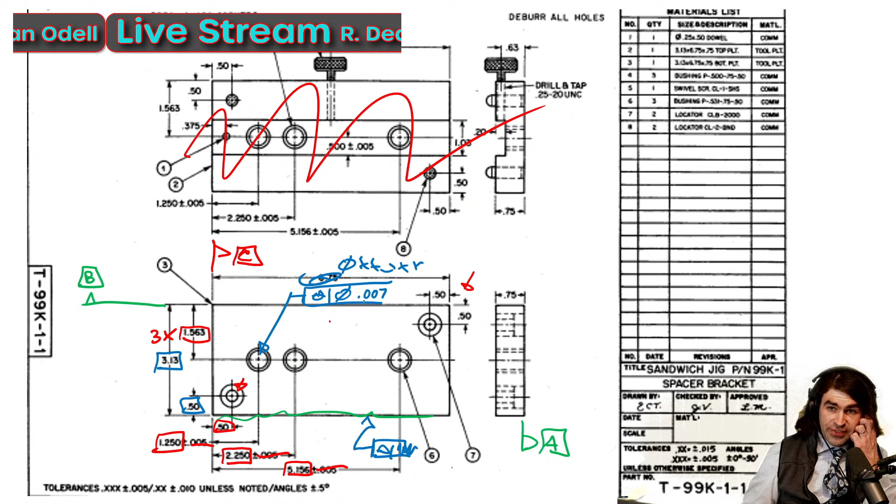Huh. Oh, okay, that's working. Cool. Oh, maybe that's it.

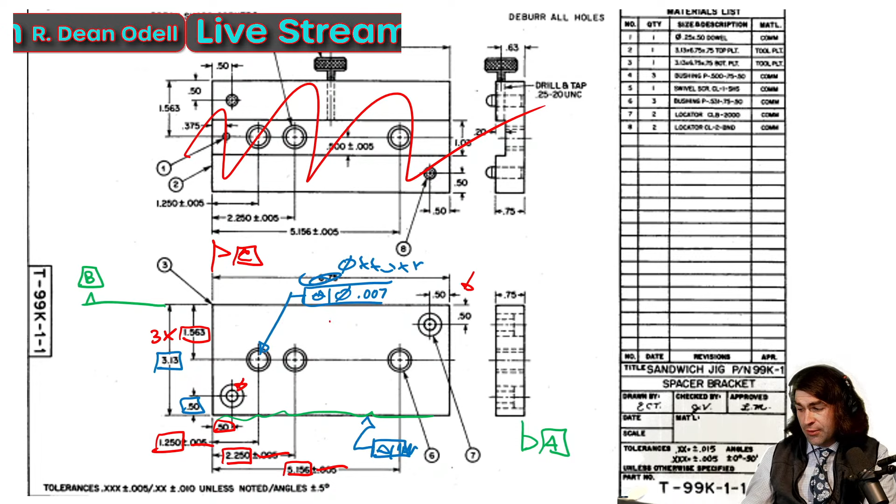This is about all I want to cover here. And then I'll save these drawings for next time. I've got a couple drawings, again, that I found just laying around. So we'll take these and make them GD&T and talk a little bit about drafting. I think overall they're pretty good, but there's some things I would adjust on here.

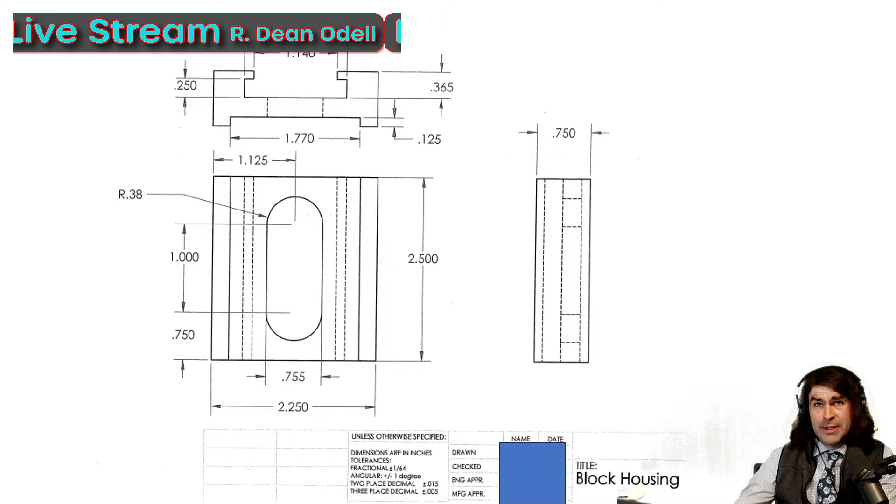20 years of built up drafting sarcasm. Yeah, you know, I really enjoy drafting. I like making drawings. I like talking about drawings. I wish I could do it more. And that's one of the reasons I'm starting to do these live streams. It gives me a chance to talk about this and get other people's opinion as well. I know there's lots of people out there that do this for a living, and lots of people that know a lot more than I do about it. I just have the opportunity to talk about it.

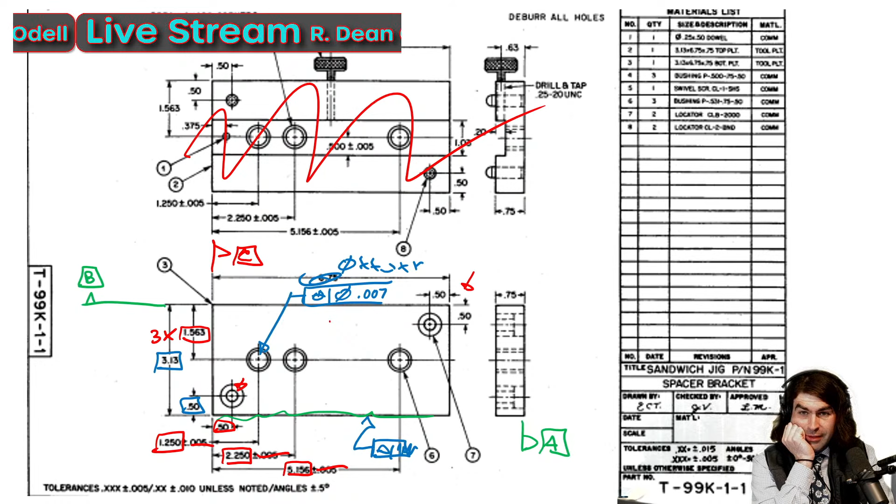Okay, so I'll leave it there. All right. Huh. Oh, man. Why did that not work? So it shows it works here. Okay, guys. Yeah, I don't see any questions in the chat. So

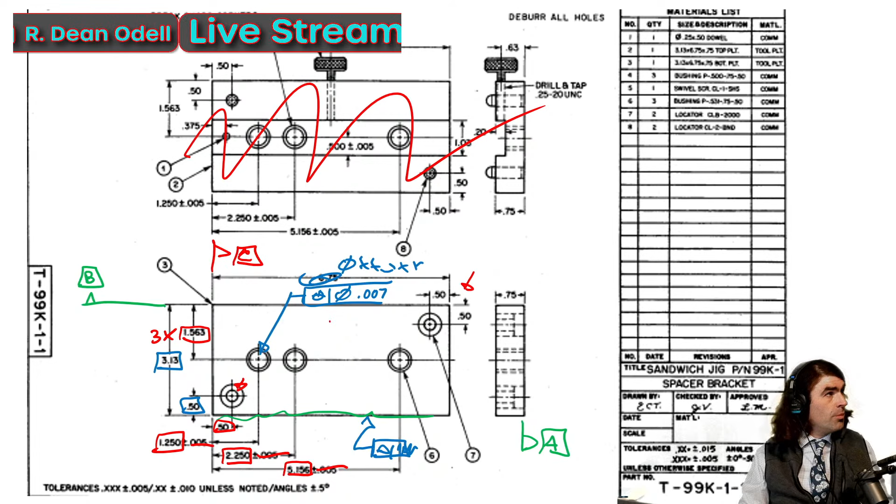Oh, interesting. Yeah, when do you think AI will disrupt the GD&T world? I don't know if it'll disrupt it for sure, but as to how much, I always think about when I was a kid with Windows 95, they had all these, they weren't called apps back then, but there was like an ape or something that would hang around in the corner of your screen, and you could click on it and have the thing do a task for you. But it was always so much more work to try to use these workarounds. Like, think about people that walked around with Palm Pilots. Was it really worth it to use that, or just easier to write it on a piece of paper? So I think it's going to be a while before AI really takes over making drawings.

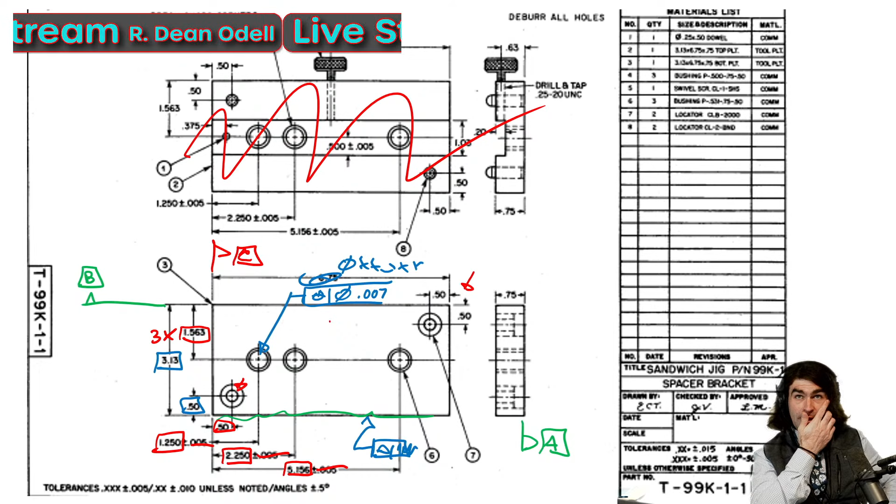Maybe it'll help. Microsoft Word is definitely better than writing stuff on paper, but I think it's just going to be an assistive tool for a while. Hopefully get rid of some of the boring stuff. It'd be sweet if AI could go in and change little stuff and fix spacing and remove some of the quirky features of SolidWorks. But I think drafting, designing, all that's going to be a trade for a while.

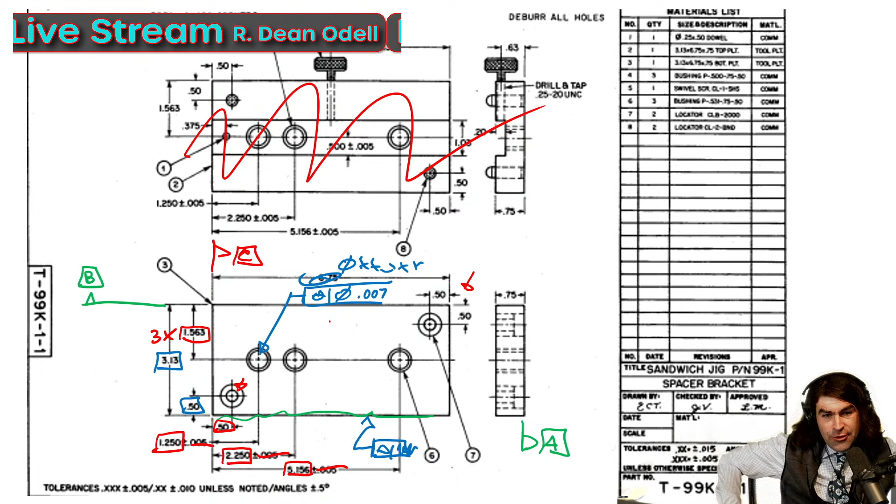And I don't know if I've seen that many drawings from China. Normally I hear about, we send drawings to them, and it's just a total mess as to what actually gets made. F-size sheets, really? Oh wow. I always thought of that as the hipster sheet size. Why would you use that willingly? Just go to E size or use C. Such a weird size. I guess maybe if you have a printer for F size, but nobody does. They're all just regular printers. So I never really understood what that was for. And I'm sure I'll get a comment in some industry, it's the standard for whatever, but it doesn't make any sense to me.